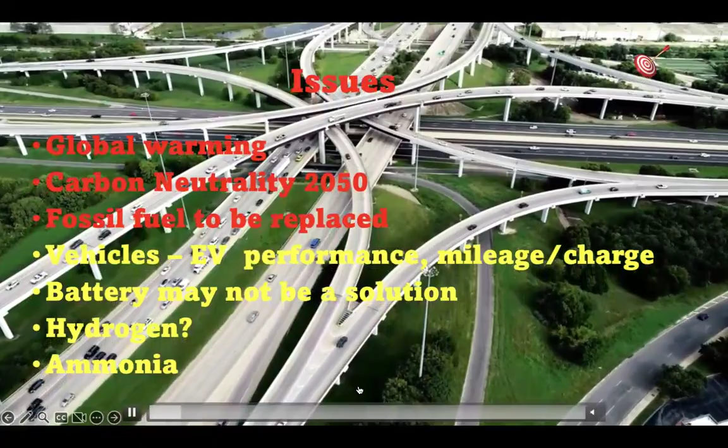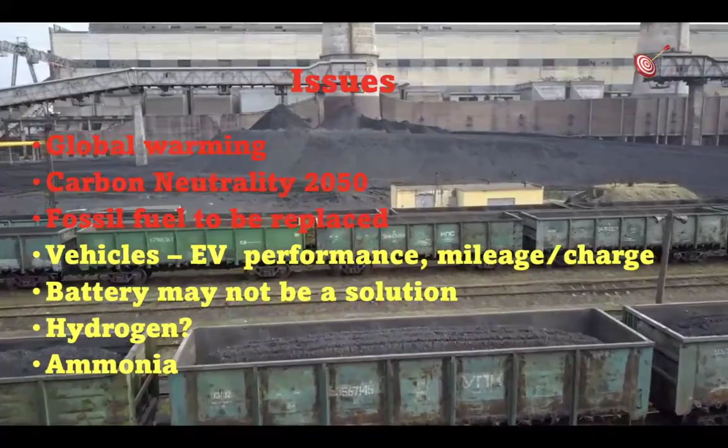So firstly, let's examine electric vehicle challenges. We've been using EVs for many years now. I think many of us have an EV anyway. So why do we still continue to use EVs, and what is the hurdle for EVs? What is the challenge? You can see that for the last many years, global warming is a major issue. And of course, carbon neutrality 2050, the Paris Agreement: we need to go for zero carbon emissions by 2050. So in order to do that, we should be able to gradually replace all fossil fuel by electric vehicles or zero emission methods.

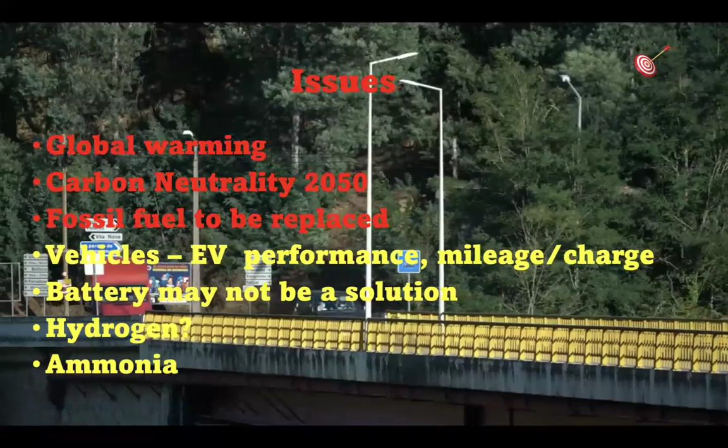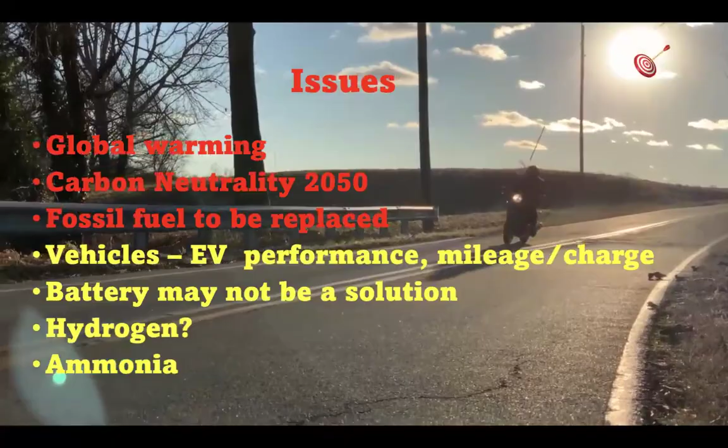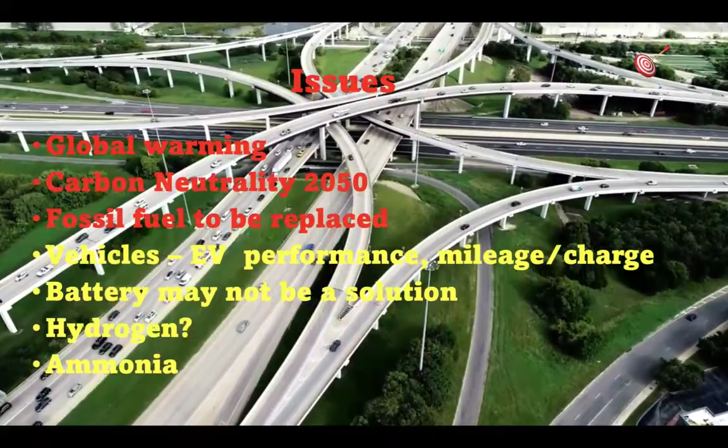So one of the ways will be to use electric vehicles. Electric vehicles theoretically have zero emission wherever they are located. So if we're able to use electric vehicles, we should be able to eliminate most fossil fuel. At the moment, still many vehicles are based on fossil fuel, so that will be a big problem. Not only cars, but we also look into ships, boats, rickshaws and aircraft systems. They also generate a lot of CO2. So that's why we need to really look into this area.

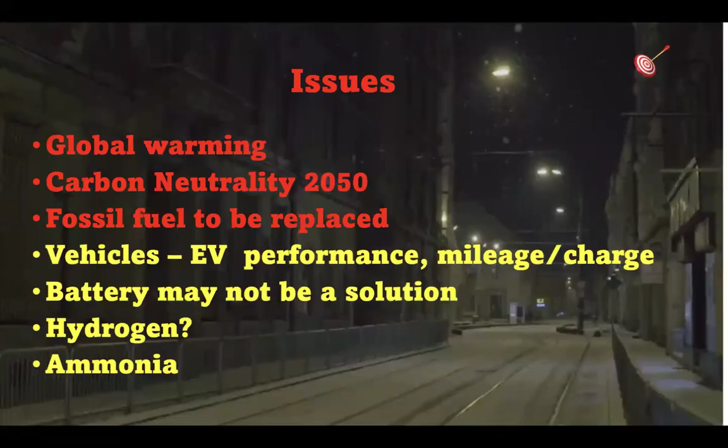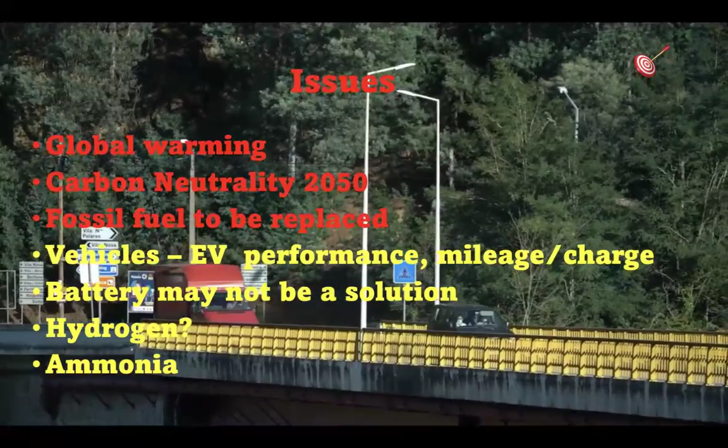At the moment, we're talking about the battery. The battery is one of the main things for electric vehicles. But do you think the battery will be a good solution? The thing is, batteries do have some emission. Later on, we'll discuss why the battery may not be a solution. We still need to think about that.

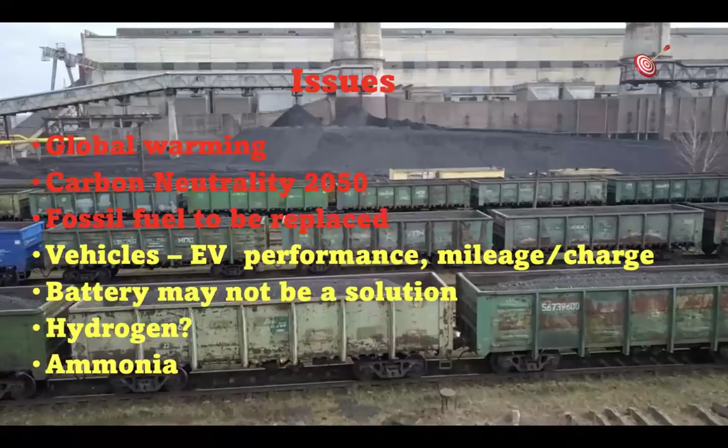So that's why for the last many years we've been thinking about hydrogen. Hydrogen will be one of the things we can use to replace, probably replace, the battery. But hydrogen has another issue; later on we'll talk about why hydrogen is still a problem. So now we're going to introduce to you the ammonia power system and how we use it for the electric vehicle.

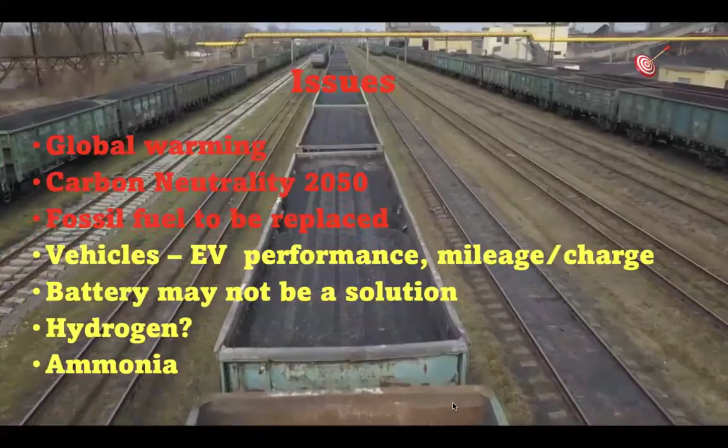For the battery, we know that the battery has been used for many years, and I think we'll continue to use batteries for the next many years. However, we know that batteries still suffer from a number of problems, including the recycling problem. How do we recycle the battery? We put a battery in the bin, then it may go to a recycling system. But I don't think recycling is done properly, especially for electric vehicles. In the next many years, we are going to have a lot of electric vehicle batteries retired. So how are we going to deal with this kind of battery?

Our EVs at the moment: we want an EV that can go for more than 1,000 km. Most EVs today only go about 500 km at most, but going more than 1,000 is what we'd like to see. Another issue will be, can we 100% recycle the battery? Batteries are manufactured in a special manner, and to 100% recycle them will be a really big problem. So at the moment we still suffer from how we recycle batteries. Do you think the battery will be a long-term solution for all electric mobility systems?

But the thing is, the battery is not only used for EVs, it's also used for other renewable energy systems, including solar power, wind power, anything. If we want to store renewable energy, we need to use batteries. So we do have a problem. We are now going to use a lot of lithium for batteries. Lithium is a really good chemical for batteries, including lithium oxide, lithium sulfur, or lithium iron phosphate. They are all good battery systems.

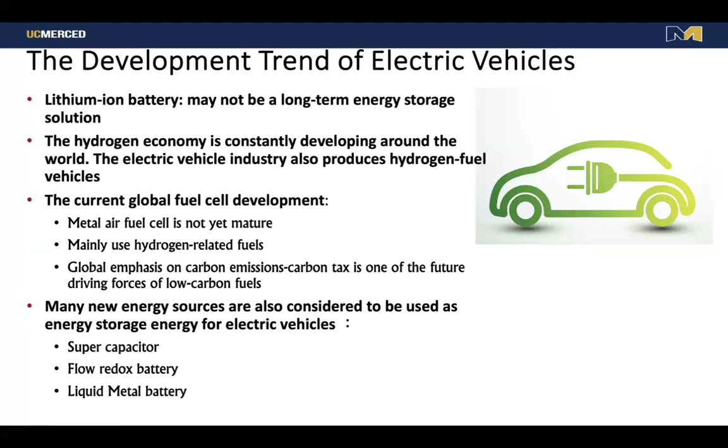The current situation is that we do have a lot of EVs in the market. Many countries and locations, including the UK and Hong Kong, have been talking about gradually replacing vehicles with electric. Looking at registrations, we have about 1.4 billion vehicles, of which 1.2 billion are passenger cars. Passenger cars are much easier to convert to electric. But overall, only 2.7% of the whole world's vehicles are electric, so there's a far way to go to reach 100%. However, for the last few years, there's been a good trend.

Because of every 4 vehicles being sold, one of them will be electric. So now you're getting more and more people switching to electric vehicles. But in the US, we see that we've got 280 million vehicles, and only 1.2 are electric. So still a little bit lagging behind, so we need to catch up.

But we can understand that, because in the US the travel distance is usually quite long, so using electricity to charge a vehicle is quite inconvenient. If you want to go to the airport or another city, you may need to travel maybe 200 miles, and 400 miles is quite difficult for an EV to fulfill. So that means at the moment, we still have to think about better energy storage to replace the battery vehicle.

But however, if we want to fulfill carbon neutrality by 2050, there's a global requirement for the countries that signed the agreement in Paris. We'd like to do that. So to do this, we only have 20-something years to go. So we need to convert all the fossil fuel into electric or a zero emission manner. So that's a target we need to fulfill. So to do this, first of all, we need to think about battery vehicles or maybe hydrogen vehicles. That's something we need to look into.

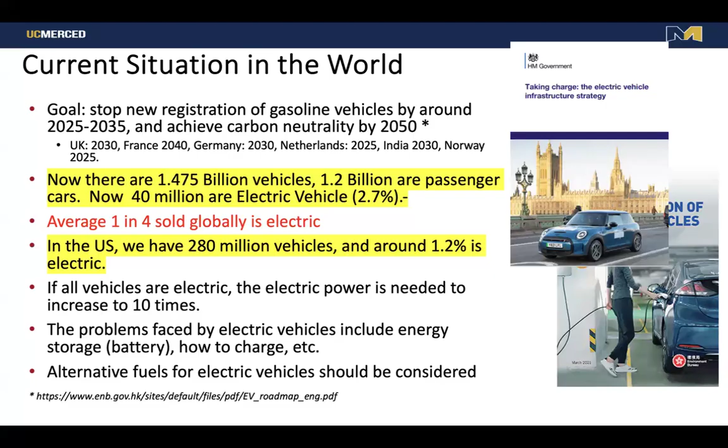And then we do need to have a battery management system to control the battery, to make the battery nice and safe, easy to handle, and with a long lifetime. For other electronics, we are trying to replace all the hydraulic and mechanical systems with all electric, including the braking system and also suspension. Everything will convert from mechanical to electric. So in the future, if you go for electric vehicles, a lot of the hydraulic and mechanical components will disappear. It will mainly be electric.

So I think now we can train more electrical engineers to work on electric vehicles. In the next 20 years, if 100% of vehicles are electric, then probably all the mechanical engineers will retire because we only use electrical engineers. That probably may not be true.

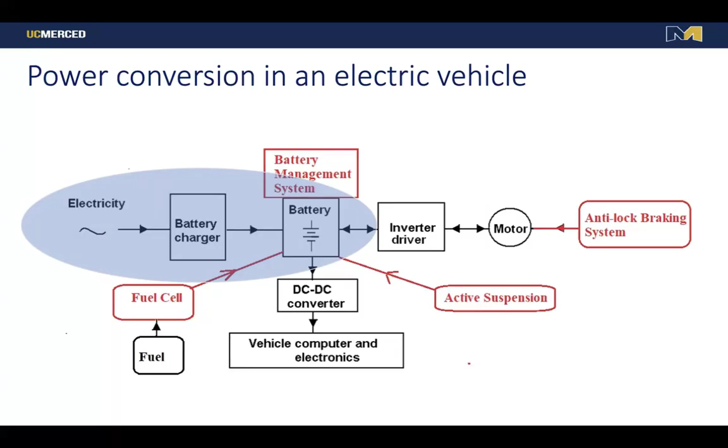But as you said, there is something that doesn't rely on chemical reaction, like superconductors or supercapacitors, which we have been using for some energy storage, but still not quite yet in the electric vehicle. And then for mechanical ones, we did use some of them for energy storage, but haven't used them quite extensively for vehicles. Chemical fuels, of course, like hydrogen fuel, ammonia fuel, or gasoline, they're all chemical. So basically, they are all things we'd like to look into.

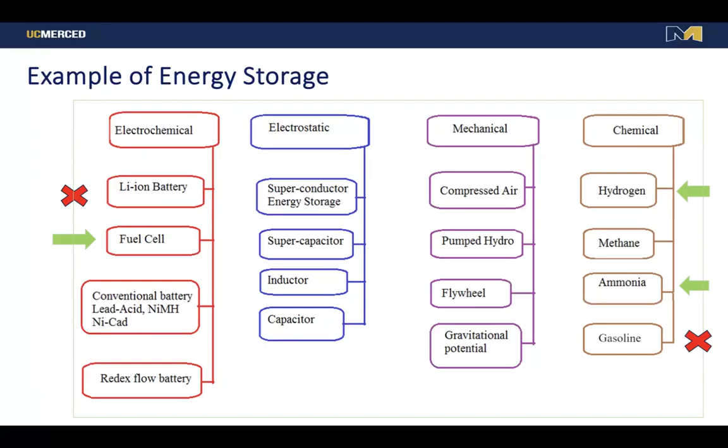But it seems most reasonable to go for carbon neutrality with those green things like ammonia, hydrogen, and fuel cells. We tend to gradually remove gasoline and lithium-ion batteries because we don't like them. We think they do have a big problem. So for energy storage, which one is the best? They all have different characteristics: either we've got really high power density, so we can generate a lot of power, or they can store a lot of energy, high energy density.

So supercapacitors are able to provide really high current rapidly, but you can only store very little energy, not much. And the fuel cell is the one we like because basically it's based on chemical fuel and can store a lot of energy, but the power level is not very high. And the lithium battery is something in the middle. So that's why for future vehicle design, we may still need to use some lithium-ion batteries, maybe some supercapacitors, maybe some fuel cells, a combination of them, depending on your design and your configuration.

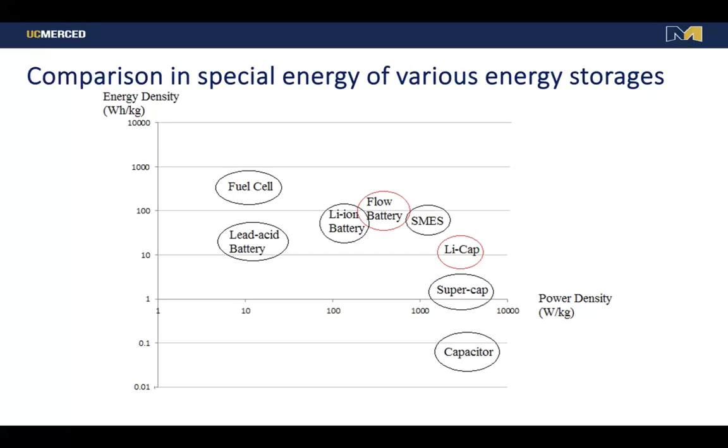But mainly, if you continue to use the fuel cell, then you're able to travel long distances. But for short durations of traveling, acceleration or overtaking, you may need to use the supercapacitor or lithium-ion battery to provide rapid energy. But one reason why we don't like the lithium battery is mainly the supply and the cost. The lithium battery mainly depends on two chemicals, lithium and cobalt. Their prices have fluctuated so much over the last few years.

You see, for a battery manufacturer, there will be so much fluctuation within a few years. Probably not only a few years; within 1 year, the price can double a few times. Then you end up with a problem. You're not quite sure how to work with the battery or battery vehicle. And other issues: at the moment, we have difficulty with battery recycling. Most battery vehicles can only run for 500 km. That's one of the flaws, you can see.

And so that's why we really need to look for other types of fuel, not only the battery, other types of energy storage to store energy in the vehicle, so that recycling is easier, the prices are more stable, or the chemicals are widely available. You see, lithium or cobalt are relatively rare materials, not exactly rare earth, but quite expensive. At the moment, most of the supply comes from Africa. We're still looking for new mines, but there's still a long way to go.

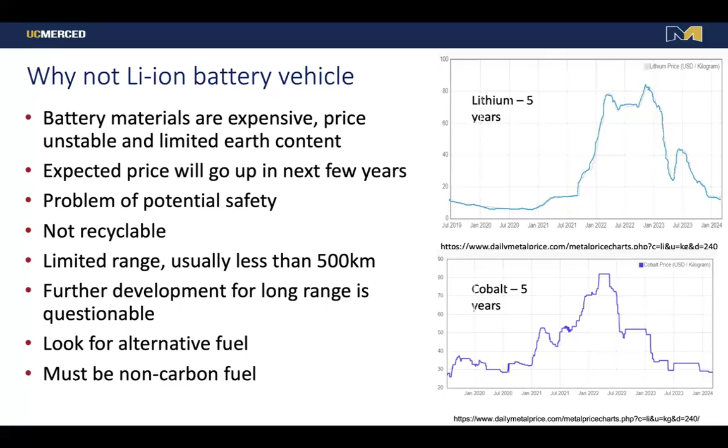But still, a lot of environmental groups are talking about lithium. When they do the mining, it's not quite environmentally friendly. Lithium is not only used in cars, but also in ships or other energy storage. Even in mobile phones and solar power, we are also using lithium batteries. So that's another issue we are thinking about.

You can see that in the next 10 years, if vehicles in the US rise from 1.2% to 50%, then how many batteries will be needed? And then also for power generation. Today we tend to go for zero emission. So that means solar power is something we like to do.

But we know that we are now building a lot of energy storage systems along the power distribution, a huge amount of battery storage to support the power distribution. So that is a huge amount of energy storage. So you can see that in the next few years, the demand for batteries is getting higher and higher, so the demand for lithium and cobalt is getting higher and higher. So if our vehicles basically rely on lithium, that may not be a good future.

So let's go through the history of electric vehicles, or of vehicles. On the left hand side, you can see the conventional petrol vehicle, the gasoline vehicle. Gasoline vehicles, of course, have been used for many years, really stable, really reliable, but they still have emissions. We are gradually trying to retire them. And of course, they're a really mature technology. All the vehicles are really safe.

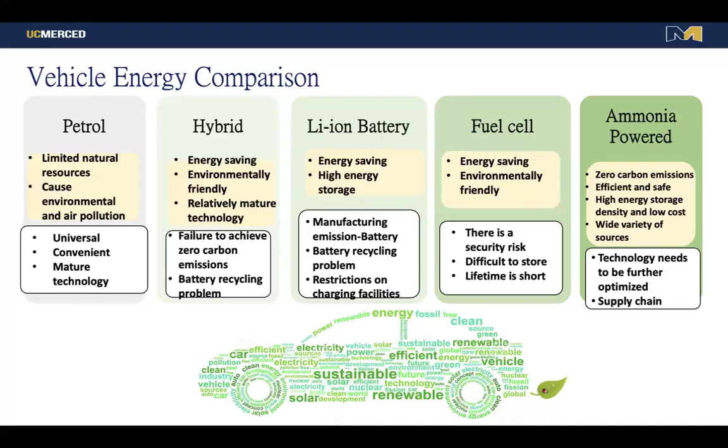But because of the issues with the battery, we need to move on to fuel cell hydrogen vehicles. Hydrogen must be zero emission, and it's really easy to recycle the hydrogen. Hydrogen is one of the major elements on our planet Earth. So probably fuel cells will be one of the best choices. But now I want to tell you, we are now looking at the ammonia powered vehicle, which is an even better solution than hydrogen. So in this first slide, we're going to show you what we are doing now.

So now, let's look firstly at the carbon footprint of the lithium battery. For different types of vehicle power, we've got a 100 kilowatt hour vehicle, which is a larger battery size, and for medium size vehicles, 60 kilowatt hour and 40 kilowatt hour battery systems. So you can see that when we manufacture the battery, we do have carbon emissions, and the carbon emission is not small. So we need to drive a vehicle for a longer duration in order to offset all this carbon emission.

So you can see that usually we need to drive a vehicle for at least 2.7 years in order to compensate for all the carbon emission from manufacturing the battery. That's not very nice to have. Even a small vehicle still needs 1.1 years to do that. If our energy comes from 100% renewable, say solar, then we can reduce that to 2 years, and then to 0.8 years.

So that is to say, driving an electric vehicle is not environmentally friendly for the first 2 years, because the battery means there's another carbon emission. So you need to drive your vehicle for at least more than 2 years in order to compensate for all the carbon emission. So that's something we need to tell you. A battery vehicle is not 100% zero emission. When you manufacture a battery, it causes another carbon emission.

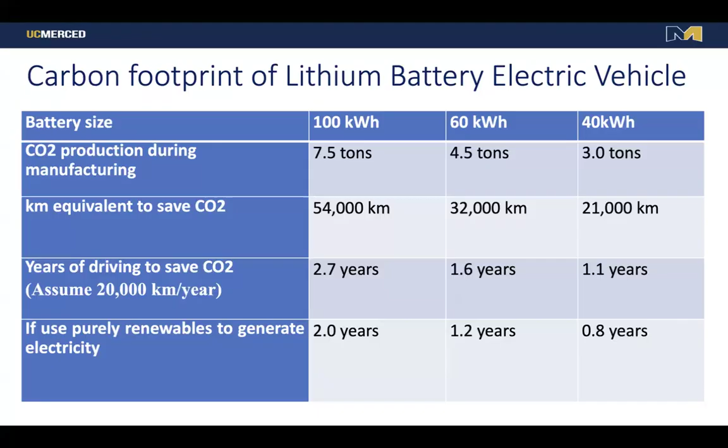So let's look at hydrogen. Now that we know the battery may not be too good, how about hydrogen? Will hydrogen become something nice to have? Firstly, hydrogen has been talked about for maybe the last 20 or 30 years. People think about how to use hydrogen vehicles better. So the hydrogen vehicle is one of the key technologies we've been using for many years. Firstly, the hydrogen fuel cell must be zero emission. The only emission is water.

And also hydrogen is one of the major elements on our planet. So that's why we don't have any issue with hydrogen mining. We don't need to do that. And recycling, of course, will not be any issue. So that's why many people like to use hydrogen.

Now, interestingly, the hydrogen fuel cell was invented a long time ago, in 1839, so nearly 200 years ago. However, we still didn't see much major development. At least in the last 50 years, we did not see fuel cell vehicles being used extensively. Instead, batteries are used more often. But we can also see that there are a lot of major enterprises manufacturing fuel cells, like all these big companies.

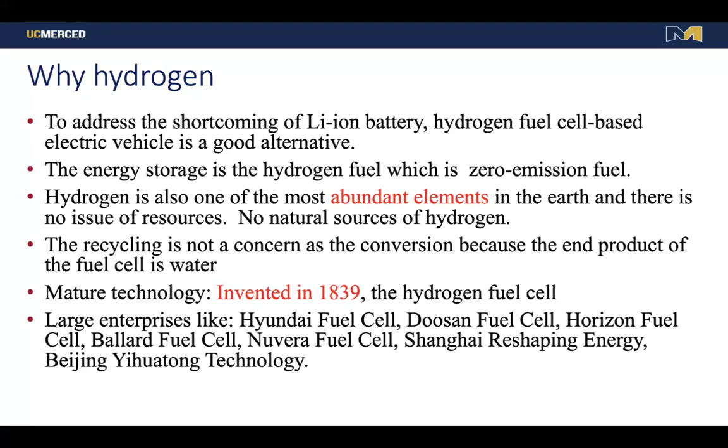They're a worldwide company, so it's really easy to get hydrogen fuel cell. So hydrogen fuel cell must have a clear advantage, but still we can see that hydrogen vehicles are not quite extensively used. Let's examine why.

Hydrogen, although nice to have, is still quite expensive. Basically we can classify hydrogen into different types: green, blue, gray, and brown hydrogen. We like green hydrogen because it means 100% zero emission. The energy used to generate hydrogen from electrolysis is mainly new energy, solar or wind power, zero emission energy.

Blue hydrogen cracks hydrocarbon fuel like methane, but the CO2 or carbon generated is captured and not allowed to release into the atmosphere, so that means near zero emission. Gray hydrogen allows the CO2 to be emitted to the atmosphere, so if you're using gray hydrogen, from our concept it's not zero carbon emission.

Brown hydrogen uses really lousy coal, so we have a lot of emissions, not only CO2 but many other emissions. So eventually we'd like to have green hydrogen, but obviously green hydrogen must be really expensive because you have to use electrolysis and renewable energy, and renewable energy is usually more expensive than fossil fuel or coal-fired generation.

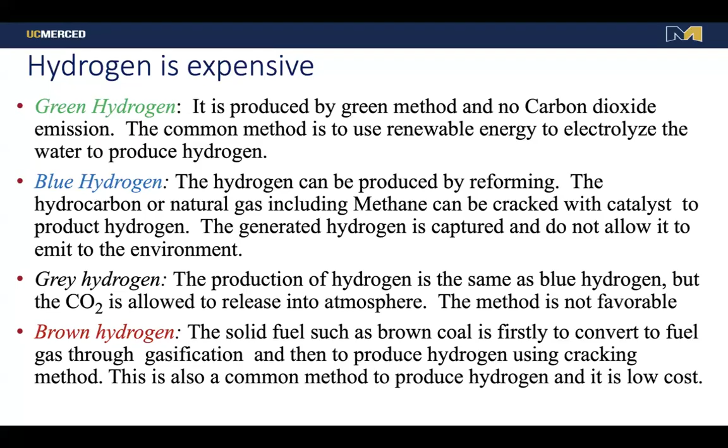Another issue with hydrogen is that some of the information is important. People have done calculations and found that, according to analysis, 1 gallon of diesel is usually considered equivalent to 1 kilogram of hydrogen, so these two energies are really about the same. However, 1 bar of hydrogen has too little energy, because at 1 bar atmospheric pressure the amount of storage for hydrogen is too little, so we usually pressurize it to 700 bar to get sufficient energy storage.

If you do that, the storage tank must be really powerful, really thick, to handle it. For instance, a storage tank with about 100 kilograms of thick metal can only store 5 kilograms of hydrogen.

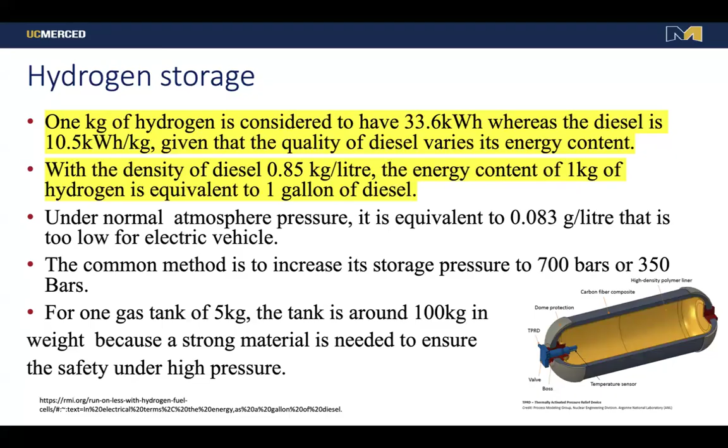For safety, hydrogen today is really safe, but because we want to store it we need a really firm, solid storage tank to hold 700 bar. At the moment, the international standard for hydrogen storage is either 700 or 350 bar, so that's why we have the issue of needing really good material. Secondly, there will be some leakage because when we store it at 700 bar, there is leakage, usually about 10% over 1 month of storage. That's something we don't like to hear.

Another thing is how to use hydrogen in the city. In many countries we have fire regulations and don't allow hydrogen stations inside the city center. Today, gas stations in the center let us fill our car quite conveniently, but hydrogen may not be the case, we may not be able to fill our hydrogen vehicle everywhere. Especially in some countries, we don't allow hydrogen vehicles to drive through tunnels or bridges, again because of fire regulation. In case anything happens, the whole tunnel may disappear.

That's something we're still not quite sure about. Mostly today, all the filling stations are on the outskirts, so that's why there are many stations in Japan as an example.

I did some analysis. You can see that for green hydrogen, the price may be 0.48 per kilowatt hour. If we compare that with diesel, it's only 0.11 per kilowatt hour of energy, so you can see that hydrogen is still expensive.

The hydrogen we get from hydrogen stations is mostly gray hydrogen. If you want green hydrogen, it's usually 4 times more expensive. So in the future, if we go for hydrogen vehicles, we'll end up paying more, or the government will need to subsidize much more.

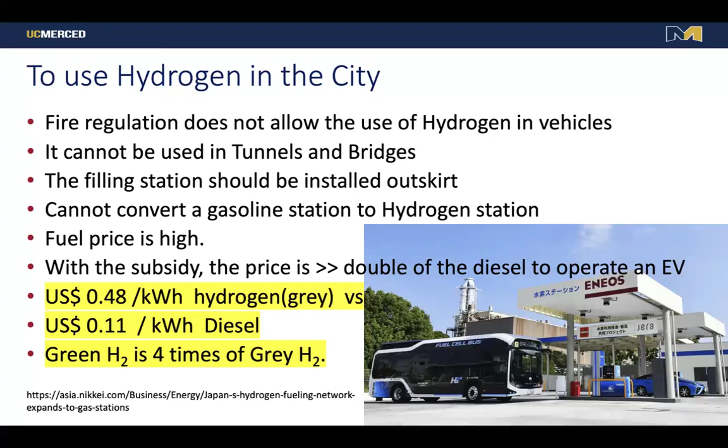Now let's look at ammonia. Do you think ammonia could be a better solution? Ammonia in formula is NH3, so for 1 mole we get 3 hydrogen atoms, compared to hydrogen gas H2 which only has 2. So by gas law, for a fixed volume, per unit volume, ammonia actually carries more hydrogen than hydrogen gas.

That's why for many years, when we want to transport or store hydrogen for long duration, we tend to use ammonia. We first convert the hydrogen into ammonia for storage. Why? Because storing ammonia is much easier and cheaper. The storage pressure for ammonia is only about 8 bar, and close to that pressure ammonia can be liquefied, making it really convenient to store.

This is really similar to LPG gas. For example, LPG gas containers are very thin because the two have very similar operating pressures. So any station that can use LPG gas can also be replaced with ammonia. That means in the future, converting a gas station into an ammonia station would be much more convenient. But you cannot convert a gas station into a hydrogen station — that's impossible, because they're completely different operations.

So for this project, we looked into ammonia to examine its performance and efficiency, and how to use it for electric vehicles. The project is about applying that technology to a minibus.

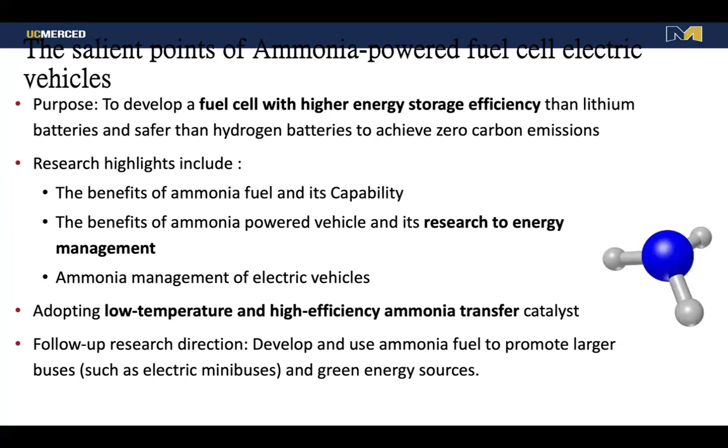After 3 months, we first developed a golf car, a smaller vehicle, to prove the concept. That's the first electric vehicle we built using ammonia.

We had to use a power electronics solution for the motor driver system. We developed an ammonia cracking system to crack the ammonia into hydrogen and then drive the electric vehicle. Basically the vehicle is the same as a hydrogen vehicle, but at the front end we put in the ammonia cracking system — that is, we crack the ammonia on the vehicle rather than store the hydrogen, because we don't like to store hydrogen; it's too dangerous to store in the vehicle.

If you store too much hydrogen, there are fire regulations affecting whether the vehicle can pass through tunnels or flyovers. That's why we don't store hydrogen, only ammonia. Ammonia only requires 8 bar. For example, this little tank here, for this golf car, is able to let it travel for 1,000 kilometers, because the energy content of ammonia is much better compared to battery.

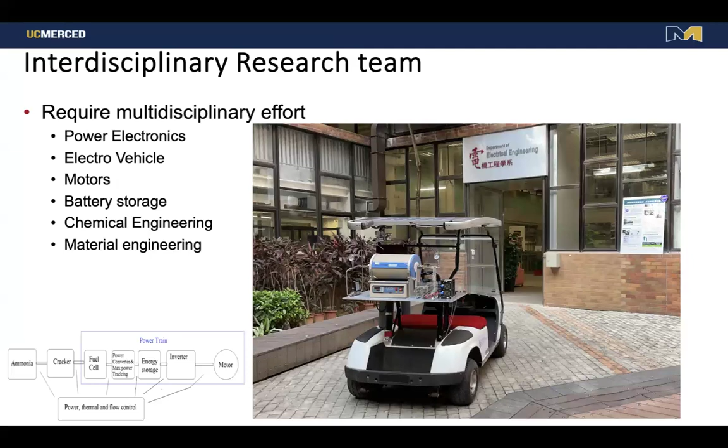So the concept is quite simple and straightforward. We crack the ammonia into hydrogen gas, then pass it through the fuel cell, a normal hydrogen fuel cell. The hydrogen fuel cell generates electricity, which goes to an MPPT, maximum power point tracking system, to track the maximum operating point, and then we store the electricity temporarily in a battery, which you then use to drive the motor. The whole system needs to control temperature, flow rate, power, and speed, so we do management to control the whole system.

Can you say something more about the chemical reaction to crack ammonia? You have NH3 as one of the reactants, and H2 as one of the products. I imagine atmospheric air is one of the other reactants, so there must be some nitrogen oxide product as well when you crack it, no?

In the next few slides I'm going to show you what happens. We don't have NOx there because we don't introduce any oxygen in that cracking — we only crack ammonia into N and H. So we are not burning the ammonia for power.

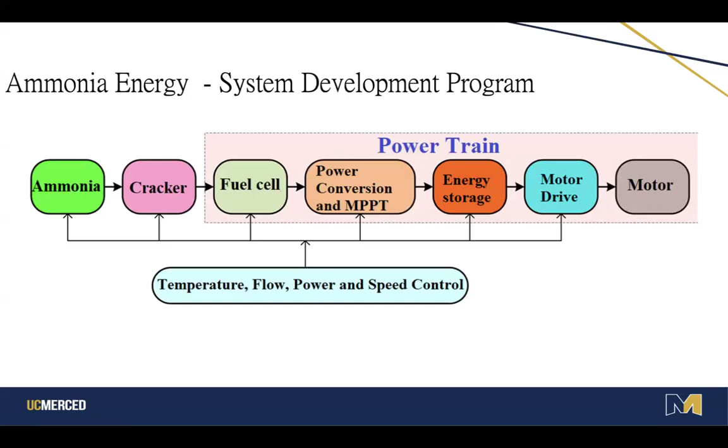Other technology may burn ammonia into electrical power to generate energy, but we don't do that. We just crack it. We use another technology to crack the ammonia into nitrogen and hydrogen. It does not involve any oxygen, so that means the key thing is we don't involve any NOx at all.

Nitrogen is not a greenhouse gas, it's just released into the atmosphere, and then the hydrogen will go to our system. I suppose you could inject it into soil, it's a nutrient. Which do you inject into the soil? N2.

It needs to be made accessible to the soil, you need to turn it. That's why ammonia, I'm really curious, because when I hear of ammonia, my biggest question is: ammonia production right now is a very carbon intensive process to make. Ammonia is currently one of the most, if not the most, commonly produced chemicals in the world, and it's predominantly used for synthetic fertilizer, and that's why they have to take the nitrogen and use the Haber process. Sorry, my chemistry background's a while behind me. That's right, Haber-Bosch, yeah. We can also use the Haber process to develop ammonia from N and H, that's another way we can generate ammonia.

So there are many methods we can use to store the energy. What we mentioned just now, we use the Haber-Bosch process to store energy using solar power, converting N and H into ammonia, and that's how we store the energy. So storing energy in the form of ammonia is much better than hydrogen, because hydrogen is too dangerous.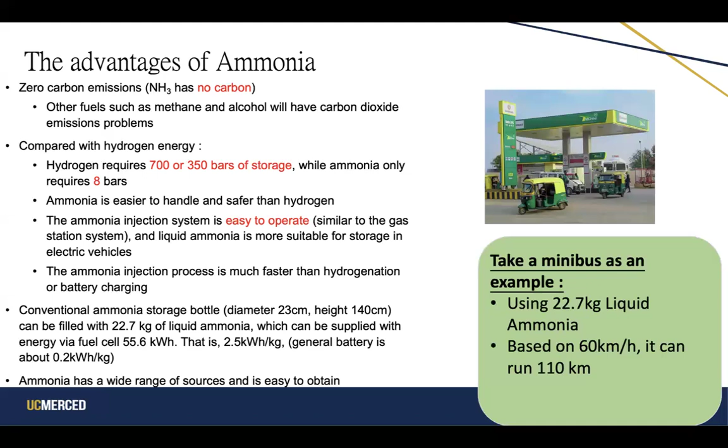In many locations we have a really good supply of ammonia. Since ammonia is used as a fertilizer, we can use landfill or other methods to generate ammonia gas. This generation process produces ammonia, or maybe methane gas and many other gases. However, ammonia can be widely available in areas that have been using landfill and fertilization mechanisms for generation - for example, companies in South China, Malaysia, Brunei, Indonesia, and Singapore do a lot of this. That's much lower cost than using the Haber-Bosch process to generate ammonia.

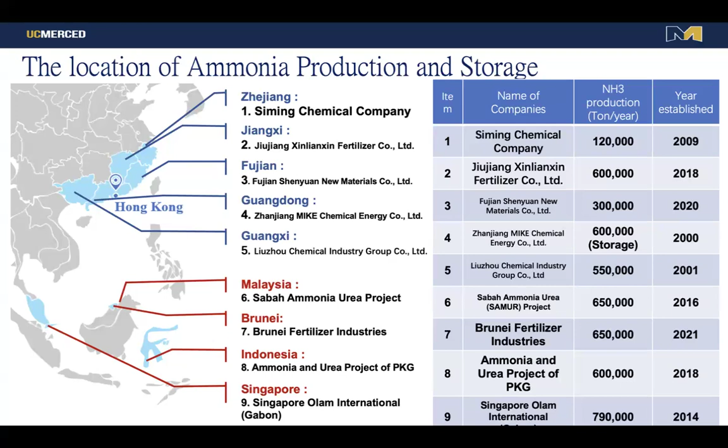Of course, if in the future all electric vehicles, ships or aircraft are using ammonia, we won't have sufficient ammonia. We would need to use the Haber process to convert nitrogen and hydrogen into ammonia. At the moment, if using that method, we should have really good resources of ammonia to supply all electric vehicles.

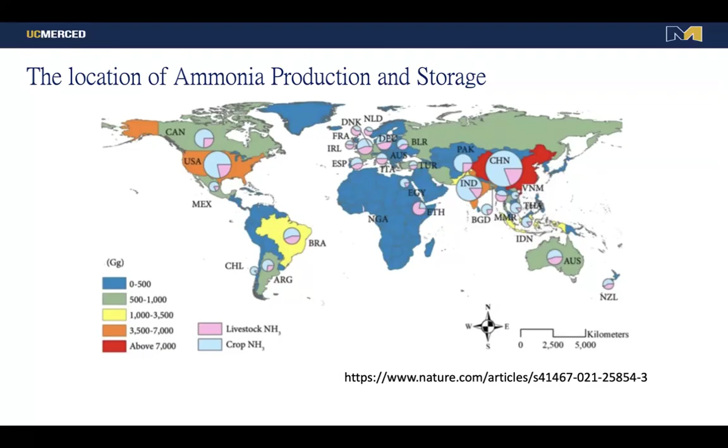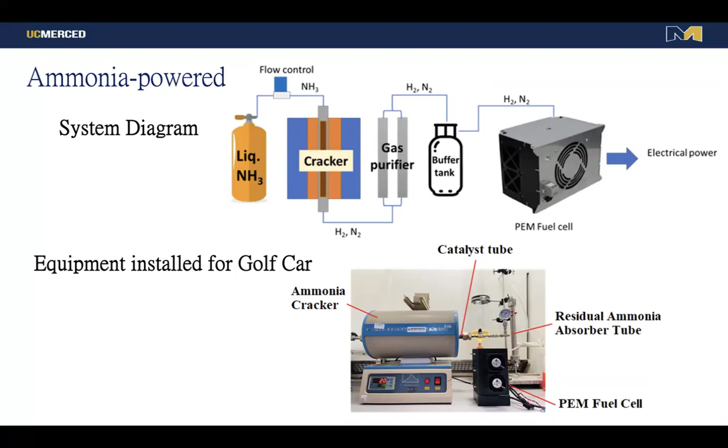So the configuration, you can see that right in here, we got the ammonia go for flow control, examined by the load management system, and then we go through the purifier. We still need to remove a little bit of the ammonia. That's only 0.1%, but we still need to remove them and then go to our fuel cell.

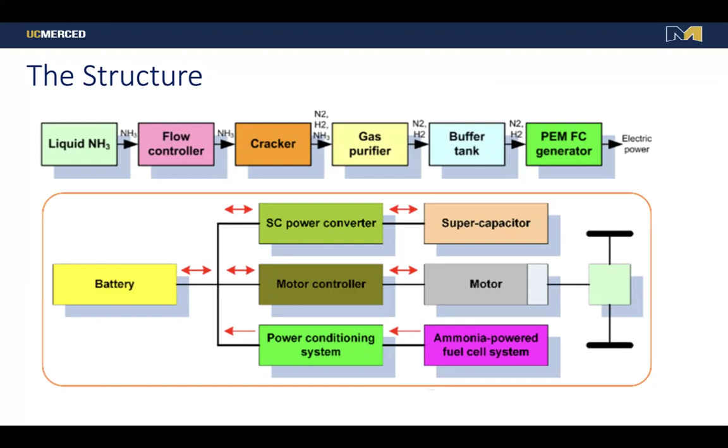For the whole system for the electric vehicle, we got a motor and a supercapacitor for energy storage. We also got the battery system connected with them. So we can also generate the electricity stored in the supercapacitor or stored in the battery so that we are able to have high power. Because when the motor tries to speed up or brake, then we get energy and store it into the battery. The generated energy cannot be stored in the fuel cell, only in the battery. So we do need to put some battery there for the vehicle.

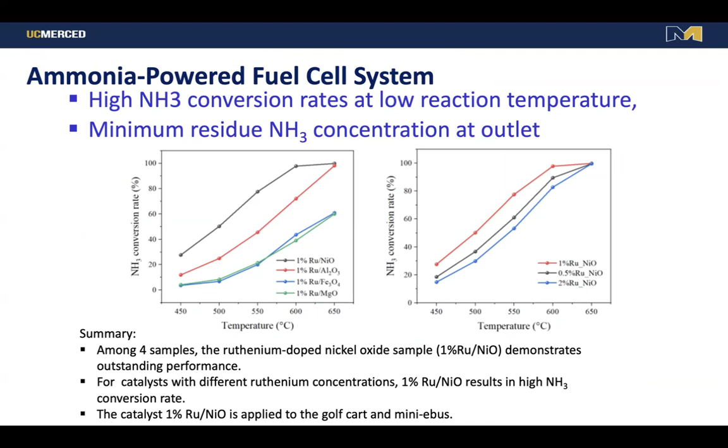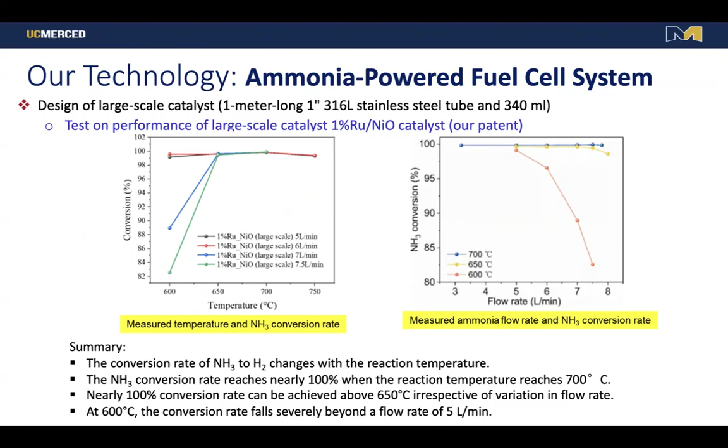So this means you need some heater on the cracker, which will be some sort of auxiliary load. Yeah, that's right. Then usually you ask how much auxiliary load; the auxiliary load works out to about 5%. Okay. Yeah, so still reasonable.

So another test we've been looking into will be the different flow rate and different temperature examination to see which was better. So our research continues. We try to see if we are able to find another catalyst able to reduce the temperature. In this case, we can reduce the energy consumption. But although the temperature is very high, our cracker design is able to keep all the heat inside rather than dissipate it outside. So the design for this catalyst could be one of our technologies as well.

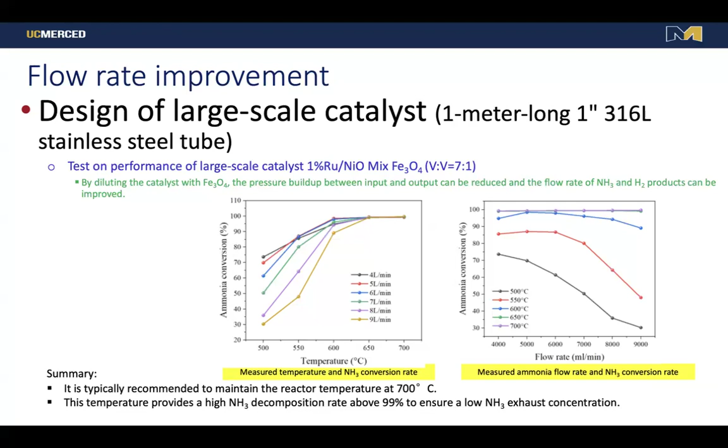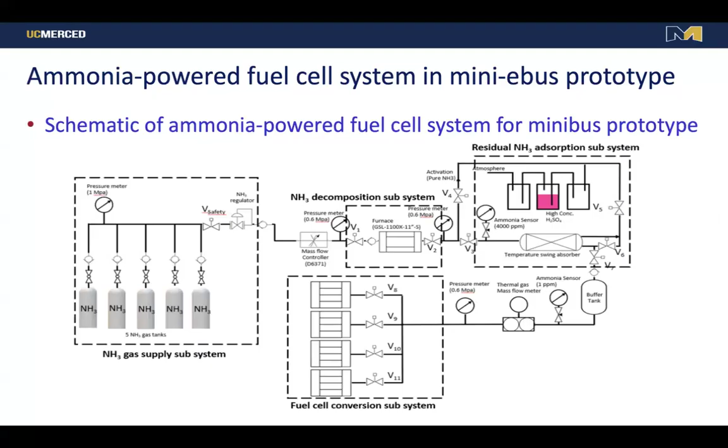So if we need high power, we can turn on more fuel cells. The good thing is that with parallel operation, it's easier to manipulate the power to match the motor requirement. Because sometimes the motor needs high power when going up a hill, at full load, or overtaking, so we need to change the power. So that's how our system looks. You can see that it consists of our fuel cell, the ammonia cracking system, and also the filter, the absorber system, and the cracking system. So all this will be located in our electric vehicle.

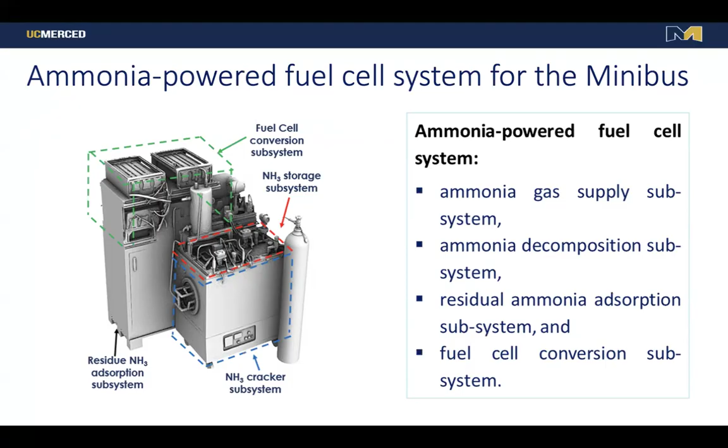So we also developed our own regulator to regulate how the gas flows through them. Our tank holds 22 kilograms of NH3. We use 5 of these tanks in our electric vehicle, and we are able to travel about 500 kilometers.

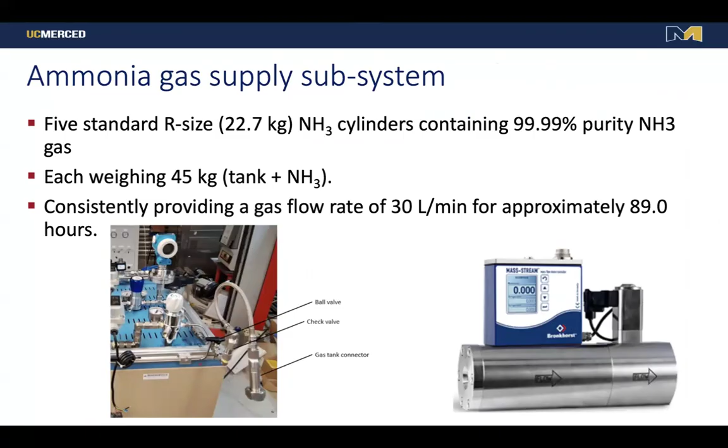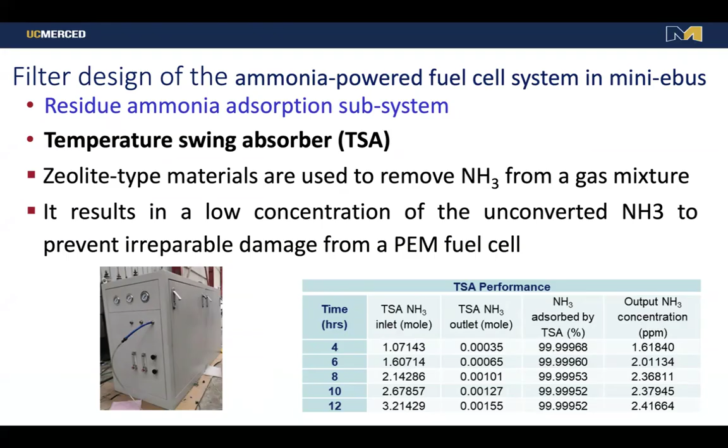So here is another test. We try to test the conversion. For this NH3, the outlet will have a sensor for the NH3 level. Everything will be filtered, and then we try to absorb them. So the conversion will be 99.9999%. That means close to 100%, we're able to eliminate all the remaining ammonia.

So this is our power testing. We are examining different flow rates for the existing system and how much power we're going to achieve. Normally we can turn on around a 24 kilowatt system. The electric motor for the vehicle is 100 kW, but we don't always need 100 kW because for cruising, the motor power is only about 20 kilowatts. So we usually use 20-something kilowatts for the power conversion.

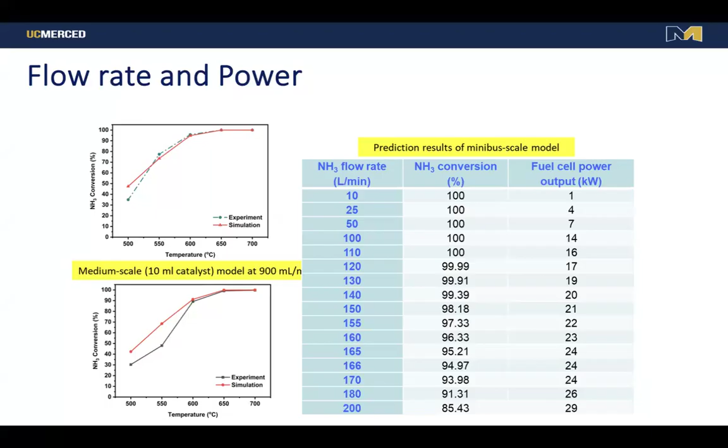In case we need high power, we can turn on a high power flow rate, but efficiency will be lower. So it depends on our design, but usually we try to optimize at the maximum power point tracking, more than 96% of the conversion rate.

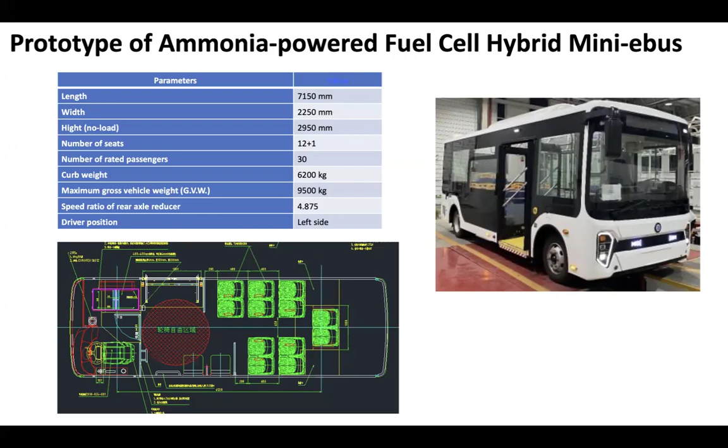So finally, you can see our bus, our minibus, about 7 meters long. That's the arrangement of our internal components. Our seats are in the front, and most of the power components are at the back. At the moment, there's no standard component available in the market, so we make all the components, including the cracker, the filter, and the absorber, everything inside our lab.

So that's the whole system design. You can see here the fuel cells; as I said, we use a number of them in parallel. We are not able to buy a 100 kilowatt fuel cell, it's too expensive for our project. So we use a number of smaller ones in parallel. If we need more power, we turn on 1, 2, 3, 4, and so on.

And the ammonia cracking system is another independent unit that we are able to fit in the front end of the vehicle. So if you have a hydrogen fuel cell vehicle, I can supply you the front end conversion unit, and your vehicle can straight away become an ammonia vehicle.

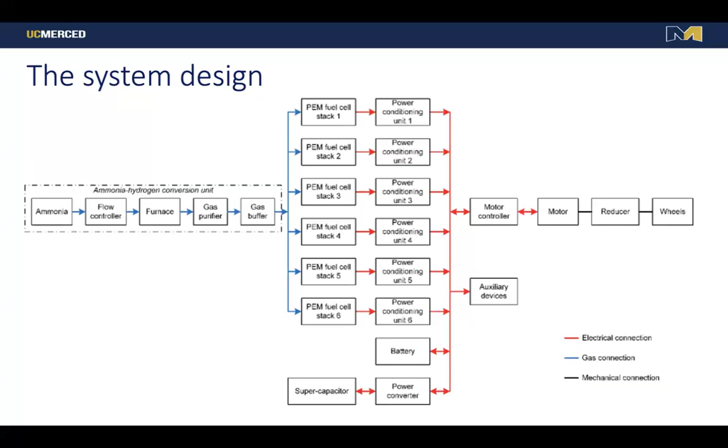You know, famously, there's a fuel cell trucking company called Nikola. And they did a demonstration of their hydrogen fuel cell truck going downhill, and it didn't actually work. They just let it roll downhill. I see. So anyway, I'm thinking about that because... So it's more enforced that our vehicle must be working in front of them, so no alternative.

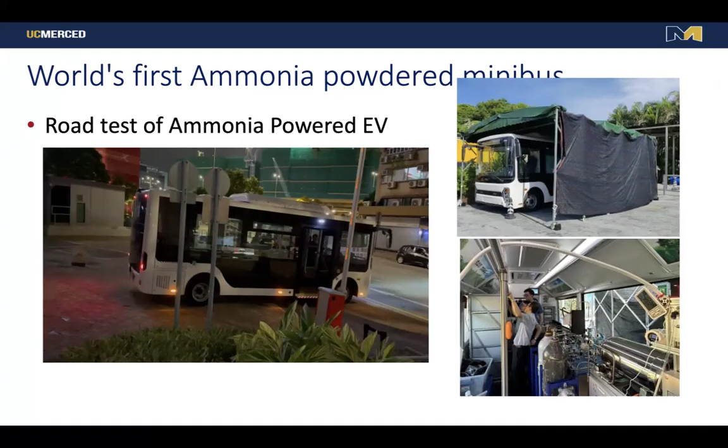So to conclude what we have done: as I said, EVs are all electric now, all the moving parts are 100% pure electric. So we need to think about the future solution, what kind of energy storage we need, either hydrogen, ammonia, or battery. Battery may not be a 100% good solution. We need to look at other types like hydrogen and ammonia. Hydrogen has been talked about for a long time, but we'd like to look into ammonia.

So we've discussed the issues with batteries. Ammonia will be a good alternative to hydrogen, mainly because it's safer and lower cost. But we don't have any supply chain at the moment; we still need to develop it. And we have already eliminated the high pressure problem. So we think ammonia will be easier to realize in the next few years.

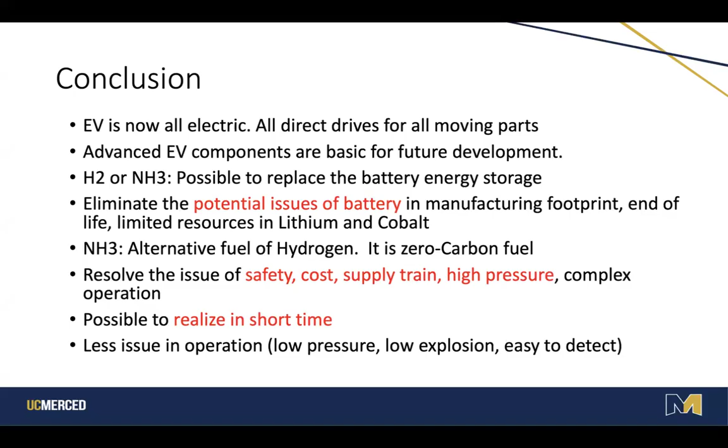So the key technology we have developed is our cracking system. We're using 1% Ru and nickel oxide, which is able to provide 99.99% conversion. That's one of the key technologies we've developed. We also developed the minibus, a light vehicle, and an ammonia energy management system.

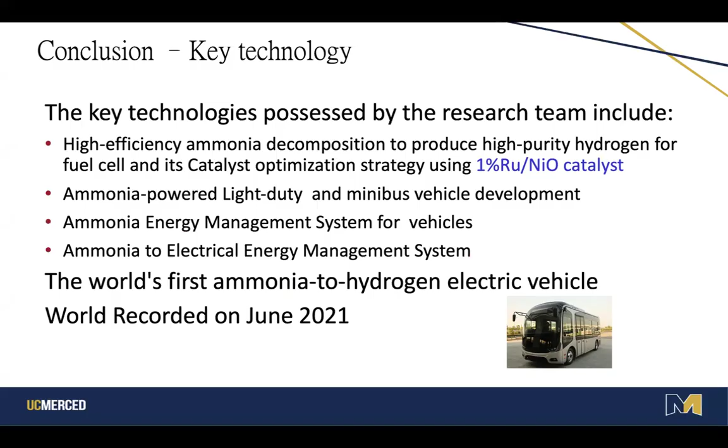So this vehicle is the world's first ammonia powered vehicle, recorded in 2021. It's interesting: when we built that vehicle, nobody in the class had done it using ammonia. They had been using hydrogen or other gases. So for future development, I think multiple energy storage is something we need to look into. We'd like to continue to work on ammonia power, not only for vehicles, but also as a power source.

Any power source can be converted from coal-fired into an ammonia power source. Many countries have been working on the so-called hydrogen economy, but I think an ammonia economy can probably replace the hydrogen one.

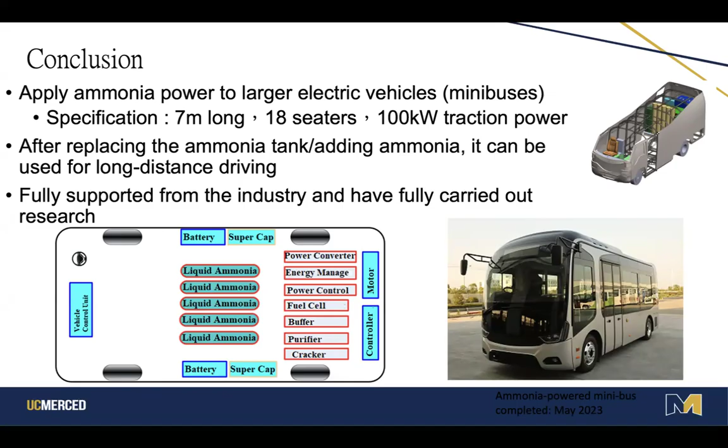So finally, you can see our design for the vehicle and how it looks. We've run out of time now. You can see our vehicle, a 100 kilowatt bus, which is the first one in the world to use ammonia to replace all the hydrogen.

You can see that the energy content of the ammonia system at the moment is 12 times that of a battery. But as our research goes on, we can increase this ratio to more than 20. Theoretically, it can go up to 40. At the moment, we only have 12.

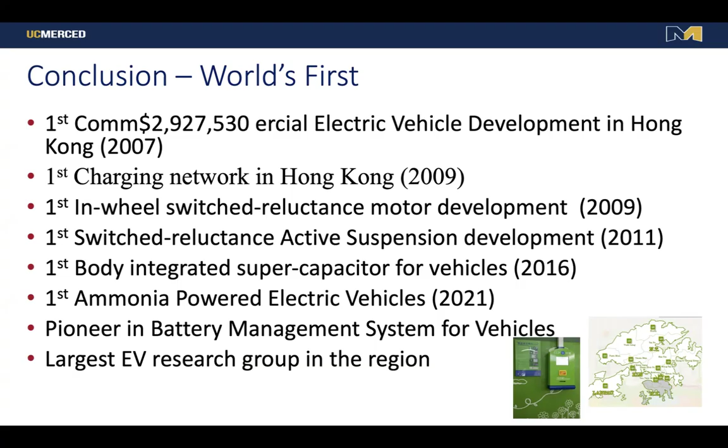So, just lastly, some advertising. We developed the first commercial electric vehicle. We also developed the first charging network in Hong Kong. We also developed the first multi-motor system, the in-wheel motor, in the world. We also developed the first all-electric active suspension and integration using supercapacitors. Now we have developed the first ammonia vehicle. So that's our contribution. Thank you.

We're a couple of minutes over, but this was so interesting and unique and different. You have to go, but otherwise we could probably take one or two questions.

Yes, please. Thank you, I enjoyed your presentation. I do agree that we need to look at additional resources besides just batteries. One question I have, though: ammonia, I know, is a toxic gas. I'm not as familiar with this area, so how would we mitigate that if there was a crash in this vehicle and the tank were to leak?

Yeah, that's a really good question. Many people ask me this. Ammonia is toxic, but compared to many other toxic gases, for example carbon monoxide, it's much milder. If you compare other factors, including the exposure factor and flammability factor, it's much lower than other gases, including hydrogen, methane, or other hydrocarbon fuels. So it depends on how you think about it.

The thing is, you can smell this one easily, which means the sensor will be much cheaper. For hydrogen fuel, the sensor is really expensive, about 10 to 20 times more expensive. And you cannot sense it with your own nose, so any leakage of hydrogen can end up in disaster. Hydrogen can easily get trapped in any corner. But with ammonia it's really easy to know there is some leakage.